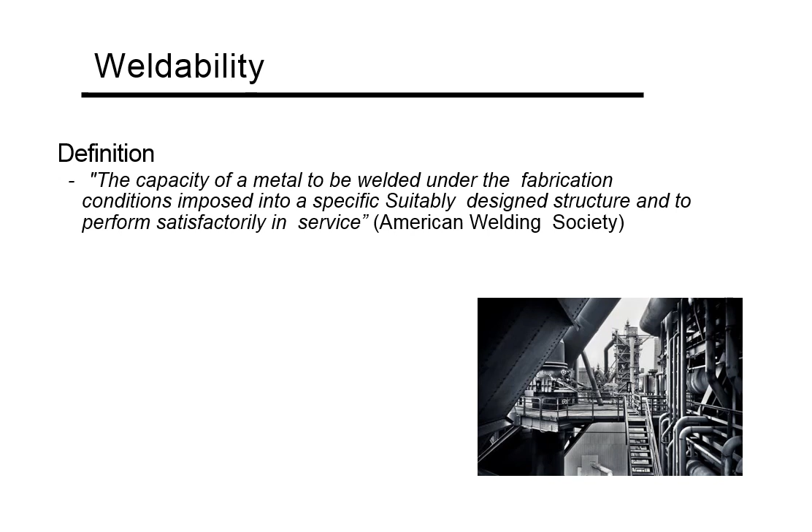So when we're talking about welds, the two main mechanical properties we're talking about are tensile strength and impact toughness. These are the two biggies, because you could have a material with great tensile strength that shatters like glass. Or you could have something with really good impact toughness that's really gummy and has no tensile strength - it just stretches and stretches and stretches. So it's finding that sweet spot for ferrous materials, particularly steels. You want the ability to absorb some energy, and you want the tensile strength that fits the design criteria. So these are the two ones we're looking at.

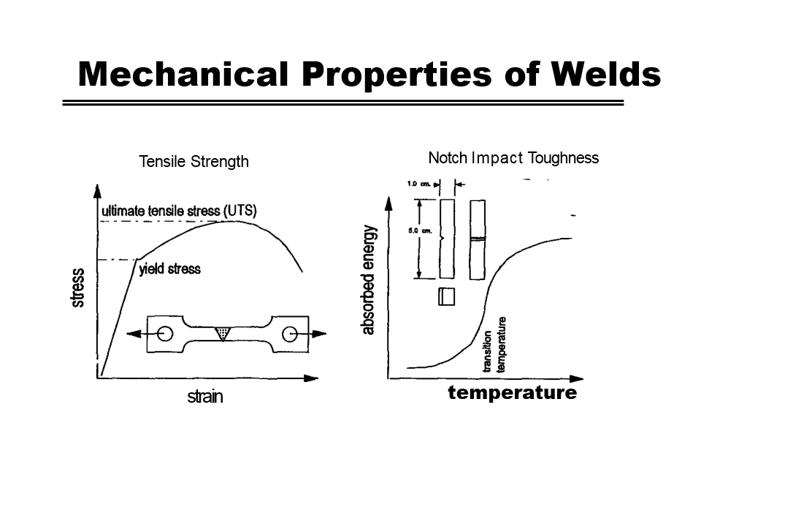And generally, everybody is looking at this - all this stuff was started way before any of us were alive. And they realized tensile strength and impact toughness were the two big criteria for welds and materials made out of steels and irons and just ferrous materials in general.

Carbon equivalent. This is something that's going to come into play in regards to both preheat and post-weld heat treat. We keep talking about chemistry, and this is how we figure out our carbon equivalent. This little equation... Steels with a carbon equivalent below about 0.45 are readily weldable with appropriate procedures. So if you've got a material and you crunch your numbers, look at your chemistry, and it comes out below 0.45, you're probably not going to have problems with it.

A carbon equivalent greater than 0.45 indicates a need for caution. Remember I said talking about caution, this should throw up a caution flag - well, this is it. If anything is above 0.45, that's when you need to start having preheat and whatnot.

I worked for a company years ago, and we'd always get a call - it was always a situation where they wanted the welding engineer to come bail them out. They'd made a weld on one of the components that had been in the field. And then they're like - we'd ask, well, what's the material? And they'd tell us, and we'd be like, okay, where's your weld procedure? How much preheat did you use? Well, we'd look at the material, me and this other engineer, and the carbon equivalent would be way higher than 0.45. And they had just welded this stuff cold, and then it would end up with a crack in it or something.

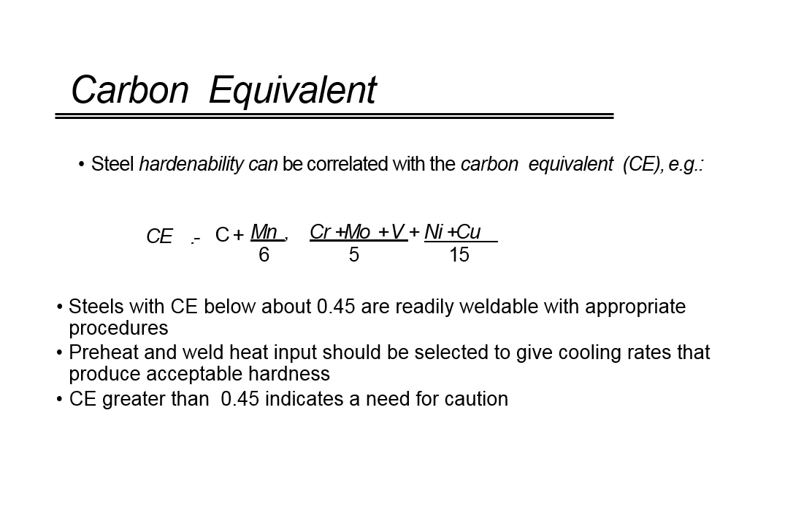This whole presentation I've been preaching chemistry, haven't I? Talking thickness and chemistry in regards to preheat, weldability, post-weld heat treat - those are the biggies. So, something to think about. Hardness testing and tensile strength.

In carbon steels, there's a direct relationship between hardness and tensile strength. The harder the steel is, the higher the tensile strength. Here you can see on the x-axis we've got tensile strength, and on the y-axis we've got hardness, Brinell. As the hardness increases, the tensile strength increases. So generally, if you've got a soft, mushy carbon steel, the tensile strength isn't going to be very high. And on the flip side, if you've got something that's really hard, odds are it's got a very high tensile strength. Something to keep in mind while dealing with ferrous metals, specifically steels.

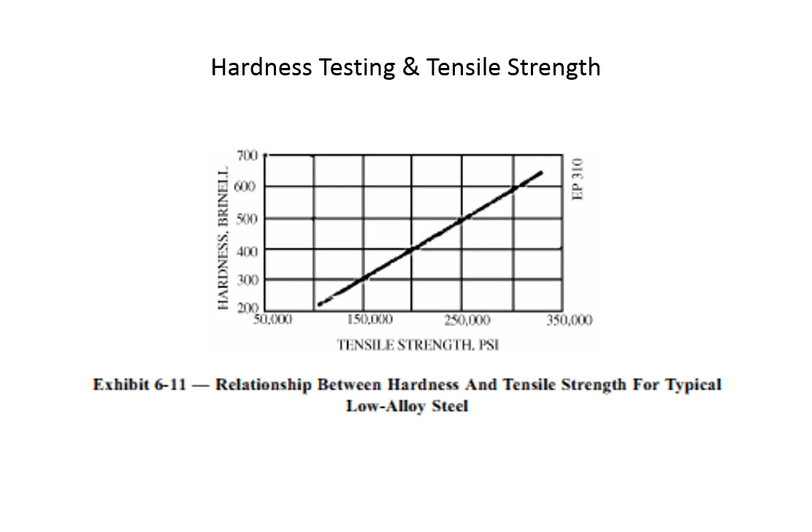So the factors affecting weldability are the steel composition and processing. What's in that material? You've got iron, you've got some carbon, and then what else have we thrown in there? And in addition to that, how has it been processed? Did we quench it, temper it, do some kind of heat treating to get it to the material strengths or the particular variables we're looking for?

We want to look at the weld metal and the HAZ properties. When we weld this material, what happens? How's the weld metal going to come out? And then what happens to the heat affected zone on the base material? What happens in there?

Choice of welding variables can affect the weldability of steels. What's the weld process? Are we considering travel speeds? What kind of fluxes we're using? There's a bunch of different ways that an organization can get themselves in trouble in regards to welding steels.

And pre and post weld processing affect it. Does this stuff need preheat? Does it need post weld heat treat? What do the codes say? What does the organization or the outfit that made the material, the manufacturer of that specific steel, what do they say to do with this stuff? How do they say to pre and post weld process the material?

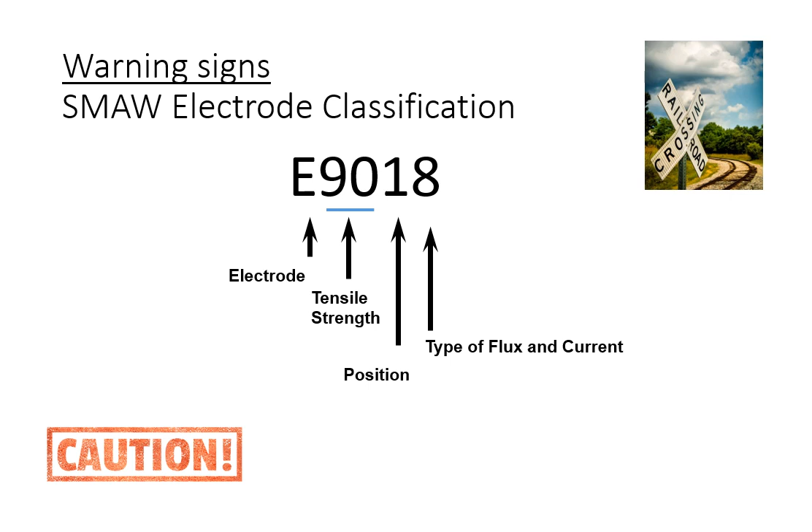A lot of guys just don't understand. They've welded with 70-18 and then you throw them some 90-18 and they're like, oh, all right, we don't really need preheat or post-weld heat treat or whatever. There's a lot of different ways things can go wrong, and they have gone wrong. So just something to keep in mind.

One place where you're going to run into this is, the weldability of steels is in AWS D1.1. And AWS D1.1 breaks their steels - and I'm just talking about the pre-qualified materials - they've got everything broken out into 4 groups. Group 1 is the material that's pretty readily weldable, and you really are going to have to work to mess it up. And I'm not saying it can't be messed up, but it's generally a pretty forgiving group of materials.

And that's why if you read through their expectations for pre-qualified materials for group 1, it's a group of materials that you can weld with, cellulose materials like a 6010 or whatever. I've got 3 columns here: the groups, the materials, and the filler materials like E70XX-X. You can see we can use anything there, we don't have to use low hydrogen, we can weld with that stuff and it's not an issue. So we could pick E7010 and weld with it, no problems.

As we go down to group 2, let's say we go with an ASTM A516, I forget the grade. On there, they've given us 3 options: you can go with a 7015, 16, or 18. E7018 is what I'm most familiar with, pretty much the garden variety off the shelf, everybody makes it. It's a pretty good welding rod for welding low carbon structural grade steels. You can weld with that stuff and not get into too much trouble. But there might be a situation with thicker materials where you're going to need a little higher preheat, and probably some post-weld heat treat.

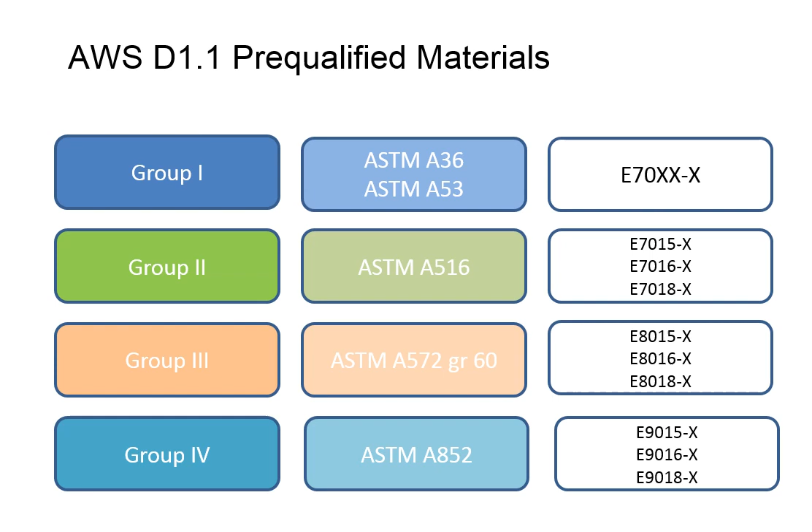Okay, now we're going to switch over to ASME P numbers. I did another presentation where I got off in the weeds and just talked about ASME P numbers. The assignments have been based on comparable base metal characteristics such as composition, weldability, brazeability, and mechanical properties. So the American Society of Mechanical Engineers years ago got together and put together base materials into groups, and they called them P numbers. It's based on how well does this weld, what's the composition, is it pretty close to me in this stuff, mechanical properties, all of that.

So that's what they put into it. My mind thinks in P numbers when I'm talking about metals—I've been at this going on 30 years. So if somebody's talking to me about a metal, I've got to look it up and think of it as a P number. It's going to weld like an austenitic stainless steel, or it's going to weld like a carbon steel. So we're going to do a little bit of a deep dive into ASME P numbers and how they react, and just some general post weld and preheat numbers.

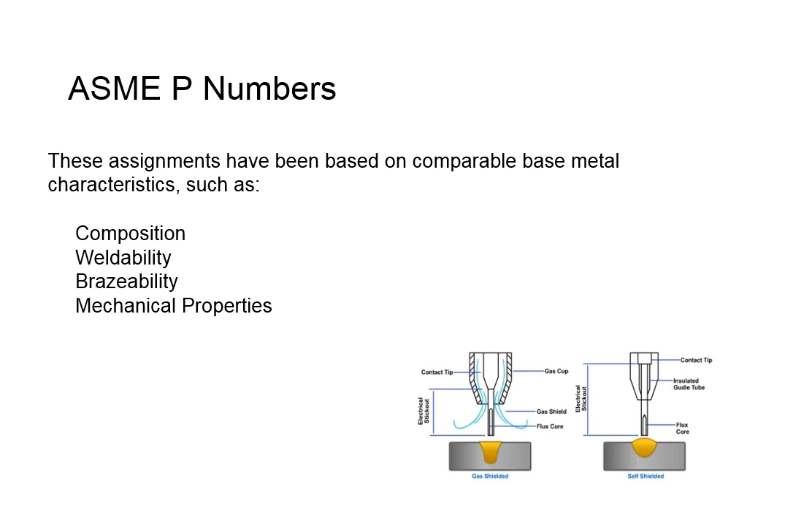Okay, so ASME P numbers—here's a list of some of them. I'm going to cover some of these on a couple of slides, but you can take a look-see here. ASME, the American Society of Mechanical Engineers, has grouped these together. Group 1 is carbon steels.

P number 2 isn't used, but I asked the guy that was on ASME Section 9 why there's no 2. He said 2 is wrought iron. This is just trivia—the Eiffel Tower in Paris is made out of wrought iron. Back in the day, I guess they used to make pressure vessels out of it in the 30s and 40s. Kind of interesting. Useless trivia for you.

So then by the time we get to 3, 4, 5A, 5B, 5C, you see we're throwing some chromium in there. That's generally for, you'll see this a lot in power plants, steam piping and whatnot. That stuff's a little more difficult to weld as you start adding things like chromium and molybdenum in there.

Then we've got ASME P number 6, martensitic stainless steels. Those things I think can be a little onerous to weld because it's a martensitic material. Anytime you see the word martensitic in a description of anything, I'm like, whoa, time out—I've got to go read and see exactly what this stuff is.

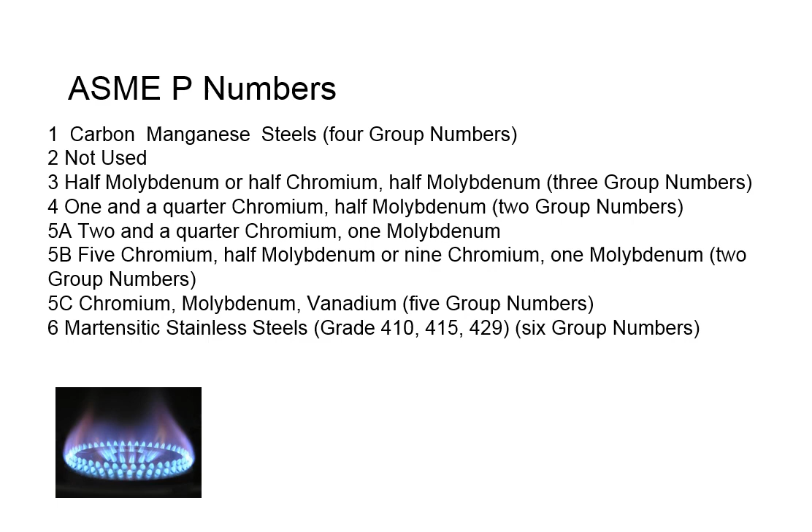So if you see a 90 KSI in carbon steels or an 80 KSI and you see the word martensitic, those to me are warning flags. It's like, okay, I'm going to have to go read. Maybe there's nothing, but I'll spend a half hour seeing what I'm welding before I charge on to anything with the word martensitic in it.

Here we've got ferritic stainless steels, austenitic stainless steels. Group or P10H, I've dealt with duplex stainless steels. Generally there you're trying not to put too much heat into the material because that'll just mess it up, so you want to keep your heat inputs on that material pretty low. Any weld procedure you qualify with that, you've got to keep your interpass temperatures low.

Used to work at an outfit where we did a weld procedure on like 12-inch thick duplex stainless steel, and we couldn't get the interpass temperature above a couple hundred degrees, so it would take us days to do the weld coupon. I'm not kidding—it was a thick material, and the welders would just sit in there until it cooled down again, then run another pass.

The other one we want to look at here is 15E, which is 9 chromium, 1 molybdenum. These are getting to be more popular in steam power plants. And these are really, what are they, creep resistant materials—creep strength enhanced ferritics, I think is what they are, CSEFs.

But these things are pretty onerous. You've got to have the preheat right, you've got to have the post-weld heat treat right. There's an intermediate post-weld heat treat that you've got to have in there and done correctly. So if you see anything that's like 9 chromium, 1 molybdenum, that's a big warning flag. You're on thin ice there.

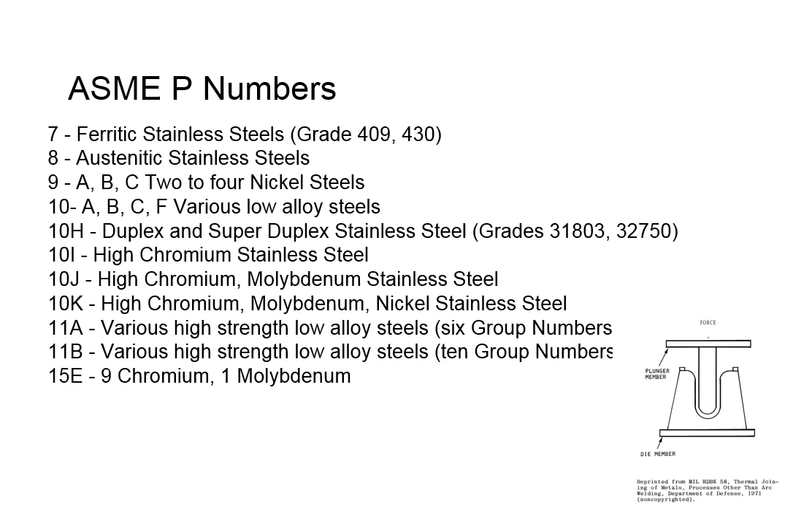You need to do some reading if you ever have to qualify a weld procedure with that type of material, because you're definitely swimming in the deep end of the pool, and not only are there sharks, but there's piranhas in that pool with you. So you've got to know what you're doing if you're going to weld the 15Es. Not a very forgiving group of materials, but something to keep in mind.

So because you've got ASME boiler and pressure vessel code section 1, you've got B31.1, B31.3, a whole bunch of different welding codes, I'm just going to take one of them. I'm going to go with ASME section 1. Most of them are pretty similar, there's some nuances and caveats where you can do something in one code that you can't in another, or vice versa. But for the most part they all address the material more or less the same. You just need to be careful and read whatever specific code you're working on, and don't go off a different code. So preheating from PW 38.1.

The need for and the temperature of preheat are dependent upon a number of factors such as chemical analysis, degree of restraint of the parts being joined, elevated temperature mechanical properties, and material thicknesses.

So here you're looking at chemical analysis - what's in that steel? How big is the restraint? How hot is this thing going to be when it's up and running? And the material thickness - material thickness makes a big difference. Are we welding something that's the size of sheet metal or half an inch thick, or are we welding a material that's 7 inches thick?

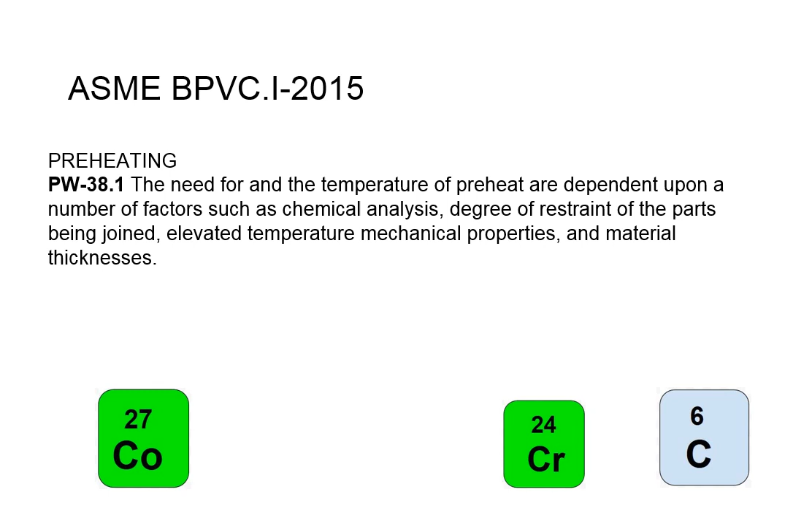You see the first thing they're throwing out there is the carbon content. If it's in excess of 0.3 and the thickness at the joint is in excess of an inch, you got to take it up to 175 degrees F before you start welding on it. But if it's less than an inch and it doesn't have a very high carbon content, you go to 50 degrees - it's pretty forgiving material. So once again, if your carbon content gets up there in excess of 0.3 and you got a really thick material, 2-3 inches, you got to heat it up to 175 degrees before you strike an arc on it.

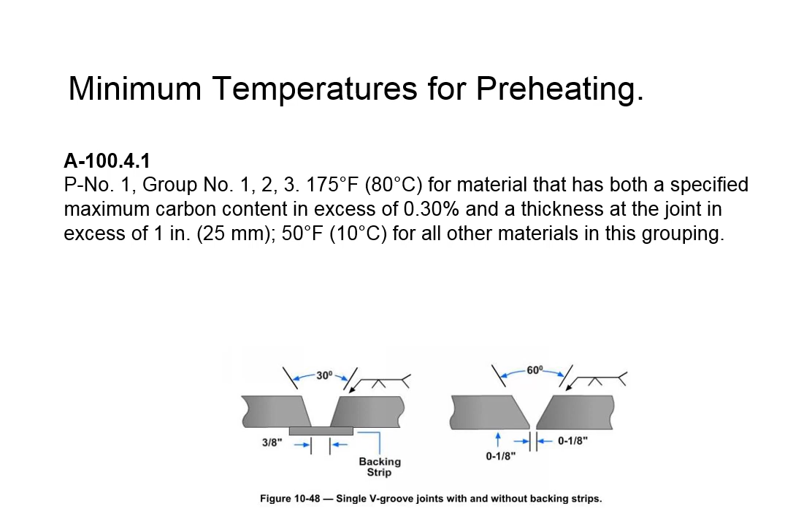So P3 is a little more onerous than a P1 material. Here you go to 175 for a material that has either a specified minimum thickness or tensile strength of 70,000 psi, or a thickness in excess of 5/8 of an inch. So for all other materials, you can go to 50 degrees. If it's in excess of 70,000 PSI, you got to go to 175. Or if the thickness of the material is 5/8 of an inch or greater, you go to 175. For everything else, you just go to 50.

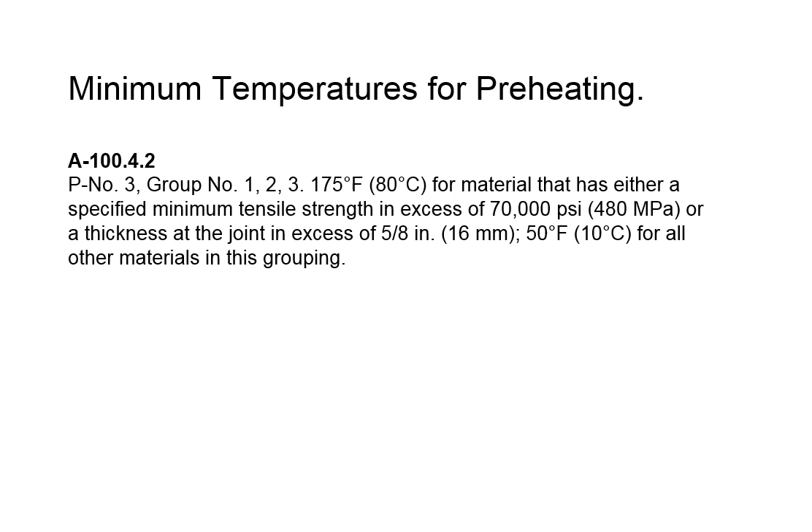So you can see as we're kind of going through this, we're getting a little more difficult to deal with. P4 materials, you've got 250 for anything that's in excess of the tensile strength's in excess of 60,000, or the thickness of the joint is in excess of half an inch. So you can see as we're kind of ratcheting it up here, P3, P4, those materials all need a preheat. Group 6 or P6, that needs 400 degrees F before you even start. So that's telling you that this stuff is pretty tricky to deal with.

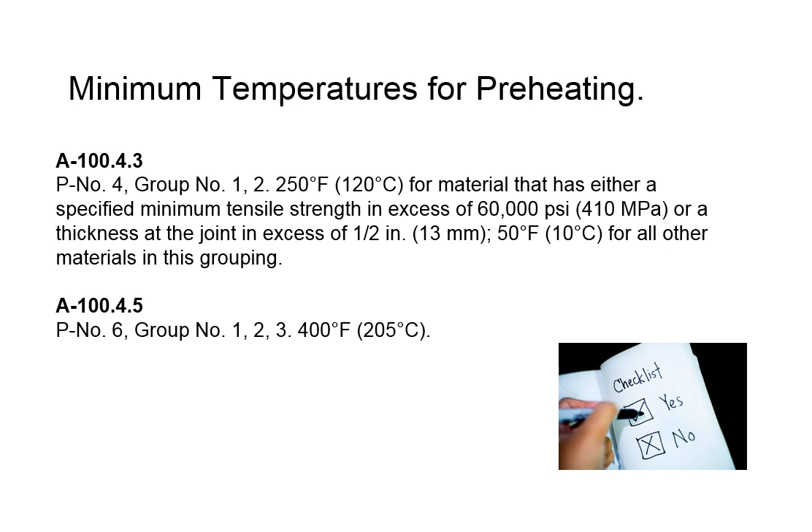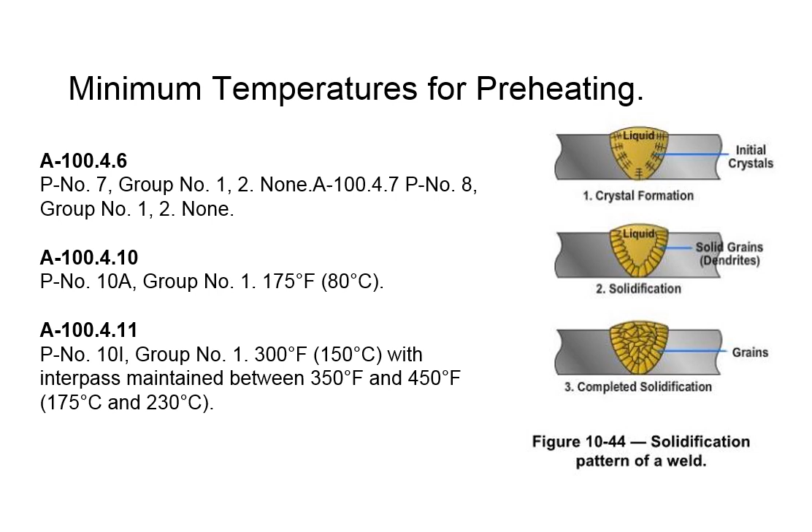But they line it out for you for the most part, and with a little bit of research and putting together your documentation, you can get most of the stuff welded pretty readily. But once again, it gets back to weldability. Stuff that needs a 300 degree F preheat with an interpass temperature of 350 to 450 is probably a little more onerous than just welding some carbon steel. Weld it and you're done with it.

So here's a couple that I've dealt with in the past that were pretty difficult. The first one is like the group 5A, P5B. These things are kind of difficult to deal with - not difficult, but you're preheating it to 400 degrees. So I don't know if you've ever welded or had to preheat something, but preheating something to 100 degrees takes a lot of thermal energy to get it there. To get something to 400 degrees, especially if it's a thick material, you are talking a lot of heat and a lot of fire.

So it's just something to think about. They also throw in there in the 5A and 5B, you need to look at the materials and what's the chromium content. So there's some things you really need to look at.

So for P15E, I worked for a company that used to do some P15E material. This is 400 degrees F, for a tensile strength in excess of 60,000. Most of that stuff does.

And then you have to look at the chromium content. If it's above 6 and a thickness of the joint in excess of half an inch, so you're either going to 400, and if you aren't going to 400, you're going to 300.

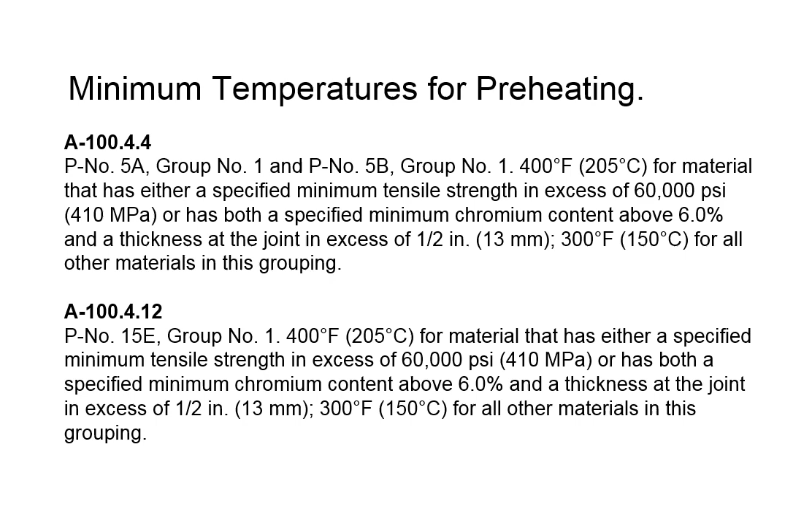So if you're looking at post-weld heat treatment, if you look in ASME B31.1, B31.3, or ASME Section 1, there are like pages upon pages of post-weld heat treatment for the different P numbers. It gives you a general outline of what needs to be done, and then there's about three-quarters of a page of exceptions or little caveats that you need to look at for thicknesses and whatever.

So with that being said, here is my version of post-weld heat treatment for ferrous materials, carbon steels, and whatnot. These are the three biggies: steel composition and processing, what is the chemistry. You've got to look at the chemistry of what's being post-weld heat treated and how it was processed, quenched and tempered or something.

Are you going to mess it up if you post-weld heat treat it? Or if you post-weld heat treat it too long, are you going to turn it into absolute mush? You're going to take a material that was supposed to have a certain hardness and you're going to cook that hardness out of it, basically anneal it.

You've got to look at the weld metal and the HAZ properties you're looking for. These need to be taken into account when you're looking at post-weld heat treatment. And the thickness of the material also comes into play, because if you put something in the oven that's 10 inches thick and you just cook the outside, you post-weld heat treat the outside and don't get the inside, well then you kind of defeated the purpose, right?

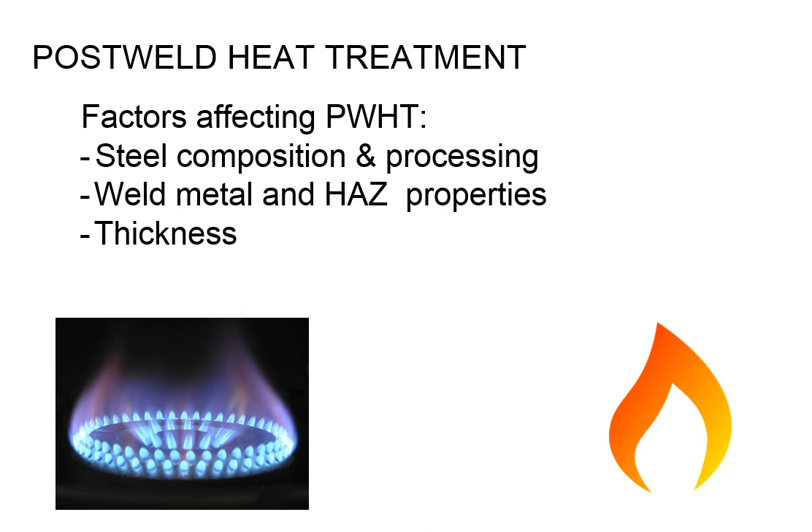Steel composition and processing. Weldable structural steels for use at ambient or moderately elevated temperatures fall into 4 categories. Key word here, structural steels: carbon and carbon manganese steels, high-strength low-alloy steels, normalized and tempered high-tensile steels, and quenched and tempered high-tensile steels.

Each one of these categories has its own nuances involved in being able to weld it and have a weld come out that meets the criteria for the weld joint and matches the base material, the tensiles and the hardnesses, and makes sure you don't have a messed up heat affected zone. So, yeah, these are pretty much the 4 categories, and each one of these is a different animal. I'm not going to go into each one in detail, but we're kind of covering some of them.

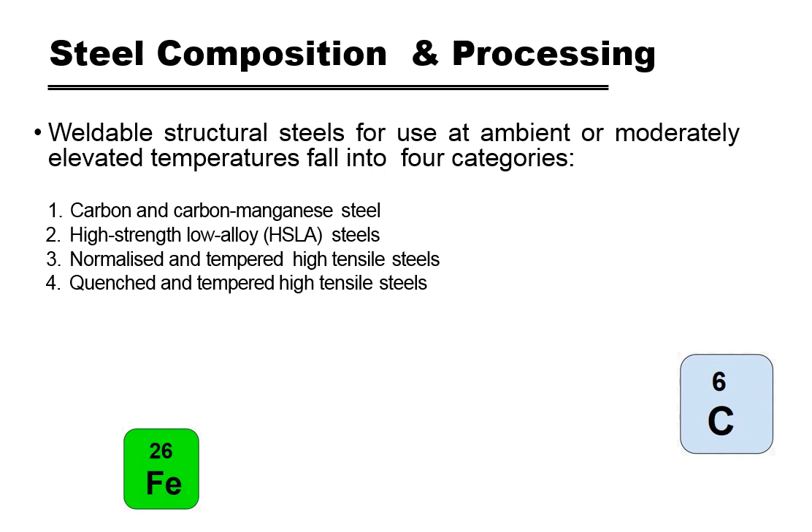Main alloying additions in steel. So steel is iron, and you throw in some carbon. Carbon is a potent solid solution strengthening element in iron. It's the biggie. Carbon increases tensile strength but reduces ductility.

So you make a really sharp sword that's got a really high tensile strength, but you're going to be able to shatter it too, to some degree.

High carbon content promotes formation of hard, brittle microstructures on cooling from above the phase transformation temperature. This gets back to Metallurgy 101 when we're talking about steel going through an allotropic phase transformation when it goes from body-centered cubic to face-centered cubic, back to body-centered cubic, and then into a liquid, and then cooling it all down really fast, and you end up with martensite, which is body-centered tetragonal.

But anyways, the more carbon you put in there, and then you heat the material up above the phase transformation temperature, and then you cool it really quickly, all that carbon that was dissolved in solution doesn't have anywhere to go.

That's why we throw in manganese sometimes, to increase strength without reducing ductility. It improves notch toughness and reduces hot cracking. So a lot of times you'll throw manganese in a steel to increase the strength, but you're not losing the ductility.

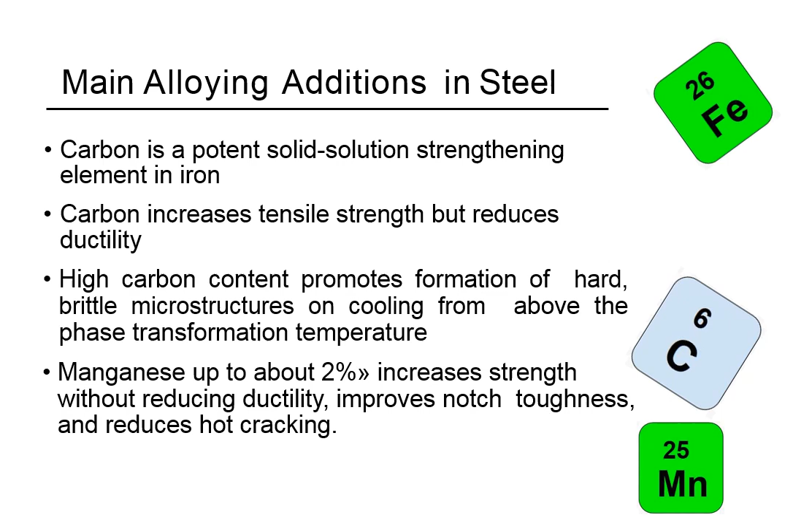Along with the things that we want in steels like carbon and manganese, there's also a lot of impurities that get left in there. If you look back on how they made steels in the 1800s, a lot of impurities were present before they figured out how to clean the material up.

So sulfur, phosphorus, oxygen, and nitrogen are the biggies. Phosphorus decreases toughness. Phosphorus and sulfur form low melting compounds that promote weld and HAZ solidification cracking. Oxygen and nitrogen form dispersions of oxides and nitrides that strengthen the metal and reduce its ductility.

So these are all things that when they're making steels, you don't want a lot of sulfur, phosphorus, oxygen, or nitrogen in your weld pool or in your weld metal in general.

I've read some things where they think part of the reason the Titanic might have sunk is they had really dirty steel. Some of the rivets might have been made out of really low-grade steel, and they needed so much steel to make that ship that they could have been getting a lot of material that was substandard. But I don't know if that's here nor there, but it's something to think about.

So these are things you do not want in your steel. Generally most specifications have a limit on how much sulfur and phosphorus you can have in your material. Something to keep in mind as you're looking at welding certain materials - these are the bad actors in there and they can mess things up.

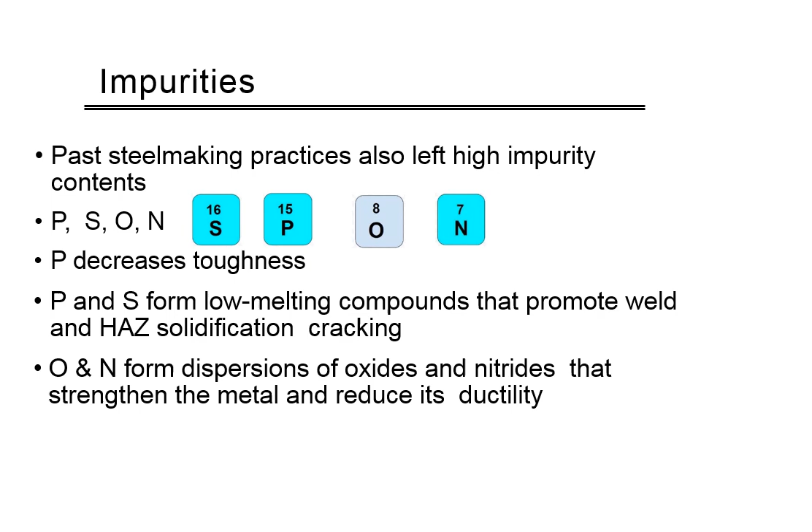Steel developments. In recent decades, new steels have been developed which offer a combination of strength, ductility, and toughness. Steps in achieving these benefits include some or all of: lower carbon contents, lower impurity contents, full deoxidization and fine grain practice, small alloying additions of nickel, chrome, moly, copper, vanadium, titanium, zirconium, and aluminum, controlled rolling temperatures, and normalizing and quenching treatments.

So microalloying with the nickels, the chromes, things like that, and keeping the impurities low and carbon contents low. There's a lot of different things that they've done, and that's kind of outside the scope of what we're looking at here.

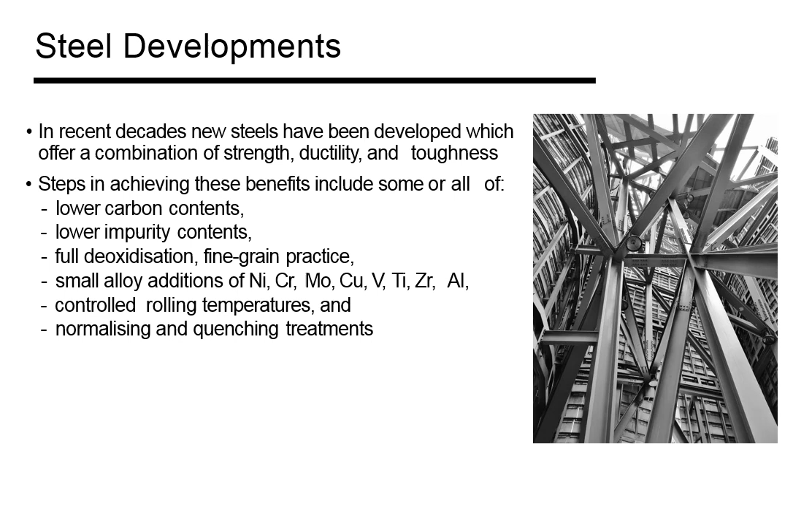But some of these materials are readily weldable and easily weldable, and some are a little more difficult. You might have to do your research and really develop a weld procedure that fits that material.

Traditional carbon manganese structural steels relied on solid solution strengthening from carbon and manganese to reach a given strength. Higher strength meant higher contents of these elements, generally carbon above 0.35%. Combined with high impurity contents, it led to poor weldability.

So if you're getting your carbon content up there and then you have things like phosphorus and sulfur in there and other impurities, it's going to lead to poor weldability.

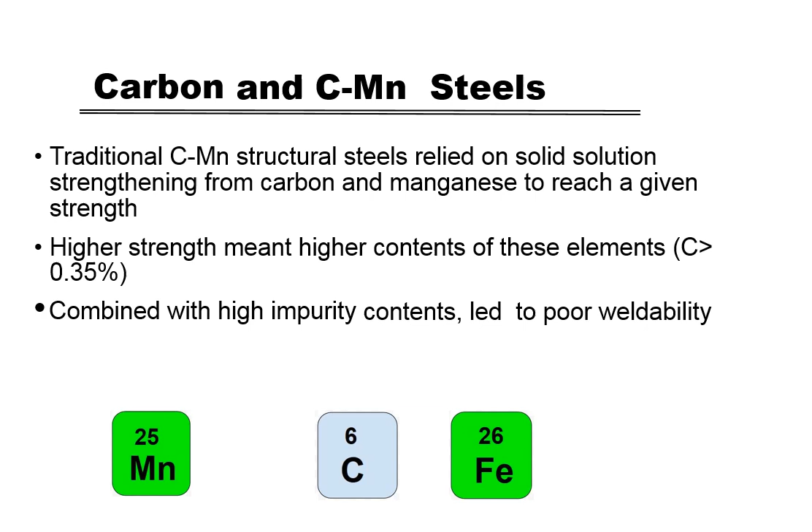Here's some steel specifications. You've got the A36, A105, and A106, which are generally P1 materials in AWS or ASME Section 9 for weldability. I think most of those are group ones for AWS D1.1.

Then you get to 514 and 515. A514 is a high yield strength quenched and tempered alloy steel plate suitable for welding. I'm thinking that's some of the material they make haul truck frames out of. It's a material that can take a beating.

A515 is pressure vessel plates, carbon steel for intermediate and high temperature service. 516 is carbon steel, moderate and lower temperature service. And A706 is structural steel for bridges. So these are just some random ASTM specifications that seem to come up more often than not, and you might run into these materials.

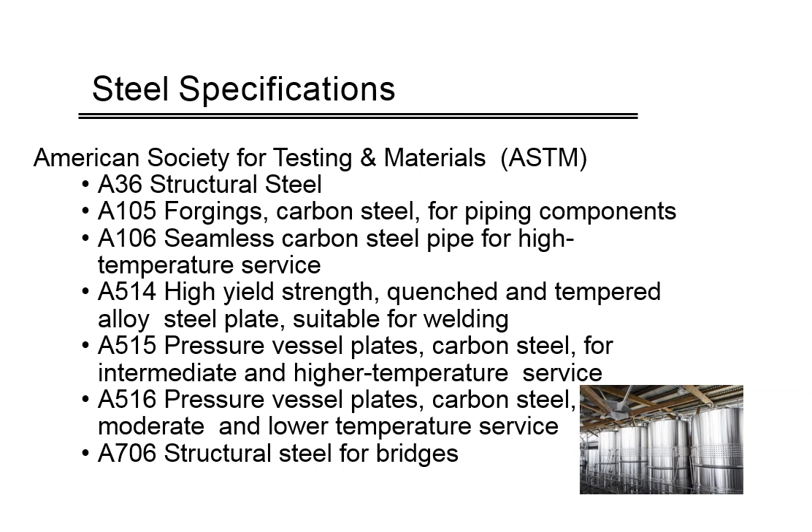Here are a couple organizations that have steel specifications. The American Society for Mechanical Engineers, ASME, and ASTM material specifications—a lot of times they're dual listed. ASME material specifications are used for pressure vessels and piping, and in CANDU reactors.

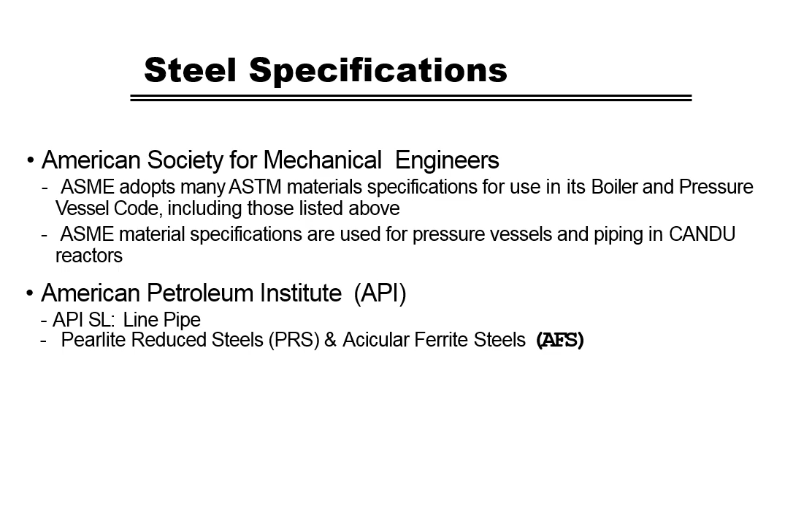All right, considering I snagged their PowerPoint. The American Petroleum Institute, they've got all kinds of materials listed for different kinds of pipes that fall outside the range of something that ASTM or ASME would use. So these are some steels you might want to look at some point if you're building something and you need pipe. High strength, low alloy steels.

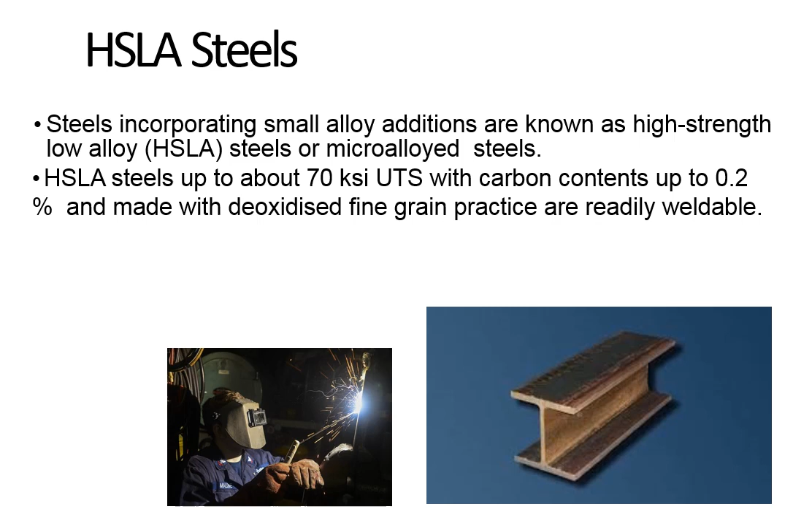Steels incorporating small alloy additions are known as high strength, low alloy steels, or microalloyed steels. High strength, low alloy steels up to about 70 KSI ultimate tensile strength with carbon content up to 0.2%, made with deoxidized fine grained practice, are readily weldable. So there's a whole list of high strength, low alloy steels that are readily weldable. Just need to follow the directions and make sure your workforce is on board with what you're doing, and generally it shouldn't be too much of a problem to weld this stuff.

Quench and temper steels—steels that rely on quench and temper heat treatment to obtain a very high strength—are more susceptible to welding problems and require specific metallurgical expertise. For example, ASTM A514. I looked up on some manufacturers' data sheets on welding ASTM A514.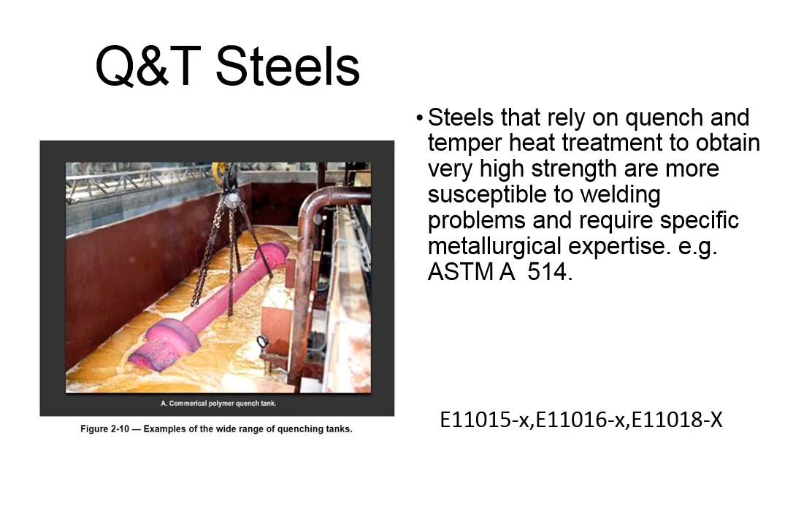So it just means it's weldable, but you just got to be careful and follow the rules. It's not something to dabble in lightly, but it can be done. Do some research, dig through the American Welding Society welding handbooks, and do a Google search on welding this stuff, and you can put together a pretty solid welding procedure in no time. But just realize you're playing with fire here—you're dealing with a material that you should handle with some care and some level of expertise.

Properties of the HAZ: the response of the parent metal and reheated weld metal in multi-pass welds to the weld thermal cycle determines the properties of the weld heat affected zone. The main factors are steel composition and processing, peak temperatures, and cooling rates. The yield and ultimate strength of the HAZ are usually higher than the parent metal, so the main properties of interest are hardness and toughness.

This is just telling us that you've got to watch that, because with a weld there's a thermal cycle, right? You're heating the material up, you're cooling it down, heating it up, cooling it down. Let's say your guys go away for lunch—it cools all the way back down to room temperature. You preheat it, and then you weld like hell for a while, a few hours, and that piece of metal heats up and cools down, heats up and cools down. There's a lot of stresses that are introduced into that piece of material.

So that's why we worry, and it's not just the weld we're worrying about—we're worrying about the heat affected zone. How wide is that heat affected zone? Are we watching our heat input into that material? What do we really got going on there? So, we're talking about the yield and ultimate tensile strength usually being higher than the parent material in this.

So we really need to watch out and make sure we don't have a heat affected zone that's going to be harder, softer, or outside the boundaries of what our materials should look like. So we really need to keep an eye on the HAZ.

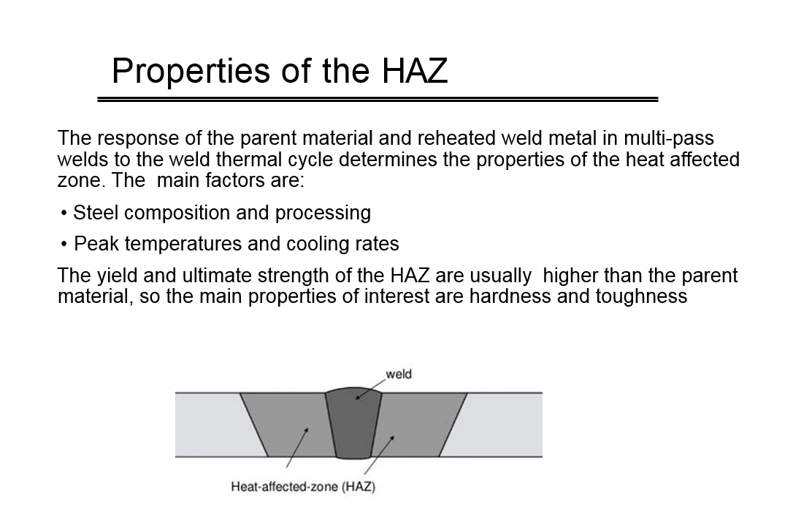HAZ hardness. Hardness is a measure of tensile strength and degree of embrittlement. In carbon manganese steels, HAZ hardness exceeding 350 HV, hardness vickers, is considered excessive. HAZ hardness is determined by alloy content and cooling rate in the transformation temperature range.

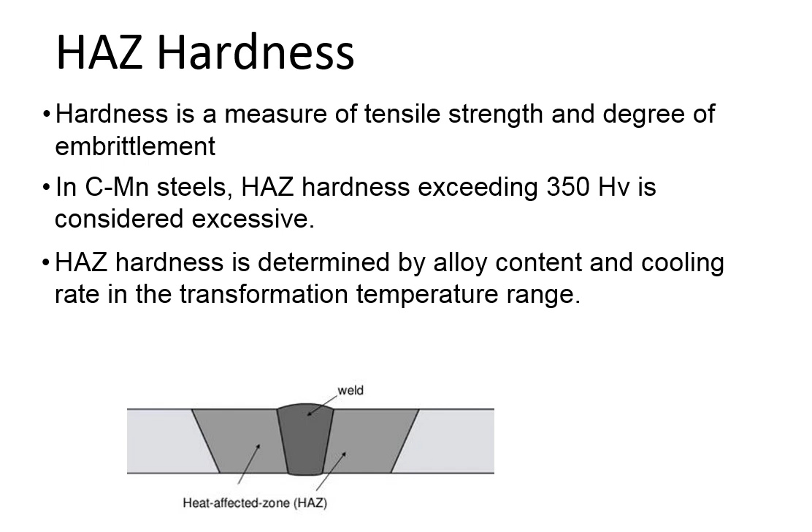Fracture toughness of the HAZ. Factors affecting toughness are the weld thermal cycle, grain coarsening temperature of the steel, transformation characteristics, and alloy or impurity content. Gets back to us talking about what's in there, phosphorus, sulfur, what kind of impurities are in there.

What was the thermal cycle of the weld? Has it been heated up, cooled down, let to sit, started up again, sat in the rain? What happened to this piece of material? And these all affect the fracture toughness of a material.

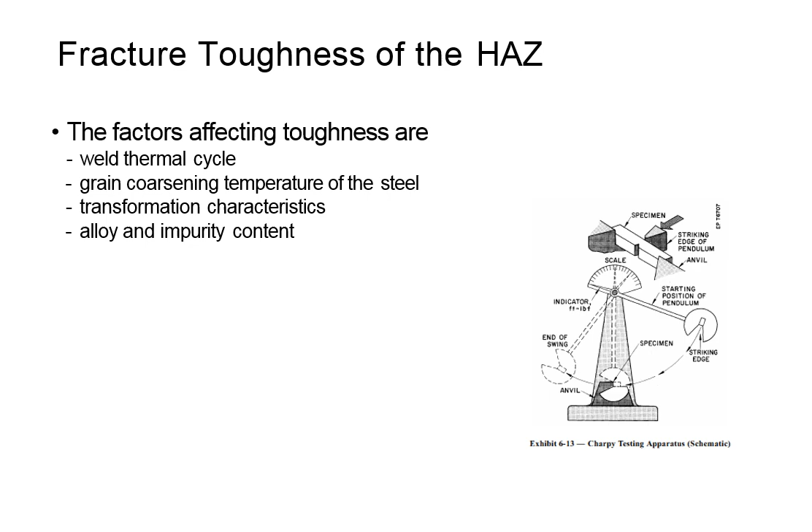If the fracture toughness of the parent steel is low, the toughness of the HAZ is usually low, and conversely, fine grain practice and microalloying benefit the HAZ as well as the original material. Low heat input welding procedures give a finer HAZ grain structure and better toughness in low carbon equivalent steels. However, in steels with high carbon equivalent content, HAZ hardness considerations set a minimum heat input. It is sometimes difficult to get adequate toughness in high carbon equivalent steels.

That last one - we used to go round and round trying to qualify weld procedures for use in oil type situations. They'd want a really high tensile strength and a really good toughness. It was really difficult sometimes to hit that sweet spot, because if you get too high a tensile strength, your toughness is going to go to hell in a handbasket. So it's trying to hit that metallurgical sweet spot, and depending on what heat treatment you're doing and what filler materials you're using, it can be a real balancing act trying to get everything fine-tuned.

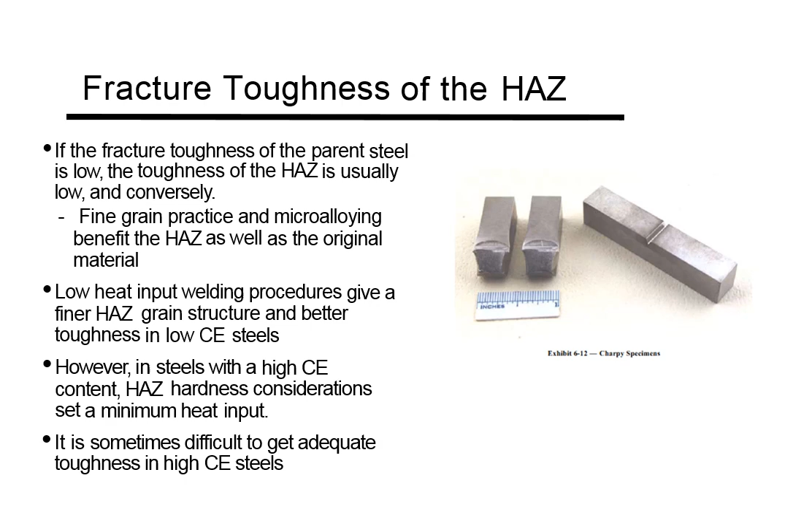So something to think about when you're welding - looking for fracture toughness and high tensile strength. Weld metal tensile strength.

The factors that govern the tensile strength of the weld metal are the carbon content - carbon and manganese increase strength, I don't know how many times I've said that or will say that in this presentation - and ferrite grain size. Tensile strength increases as the ferrite grain size is reduced.

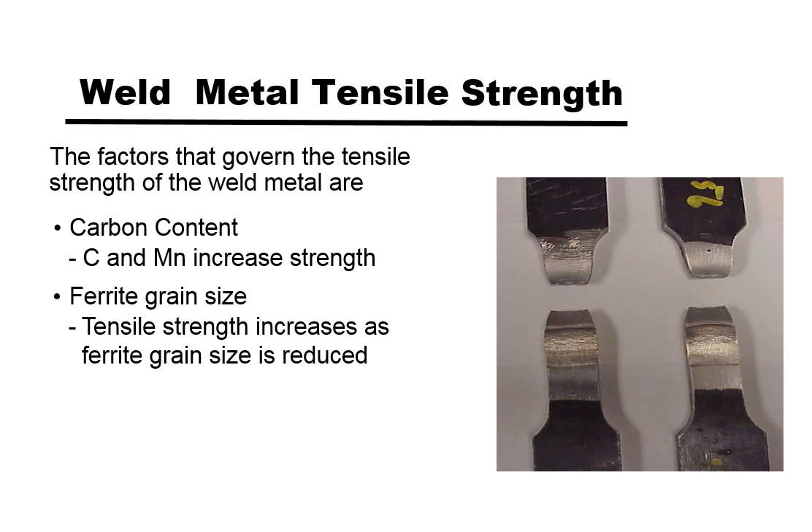Summary of the weldability of steels. Kind of trying to wrap this up before it turns into a 6-hour Gary Pace rant on how the universe functions. But anyways, in my universe, the ideas I've gleaned from others on the factors affecting weldability are: steel composition and processing - what's in that steel and how was it processed, quench and tempered or whatever, annealed, who knows; what HAZ, weld metal, and properties are we looking for; welding variables like travel speed, heat input - these play a huge role in the weldability of steels.

And then what do we need to do to the material before and after we're done welding it - do we need to preheat it, post-weld heat treat it? Thickness is another one that really comes into play in my mind. If we're welding 6-inch thick pieces of material, that's a hell of a lot different than welding half-inch thick material. So that's another one that comes into play. And then welding processes - what welding process are we going to use? There's a number of these, but basically that's what we covered.